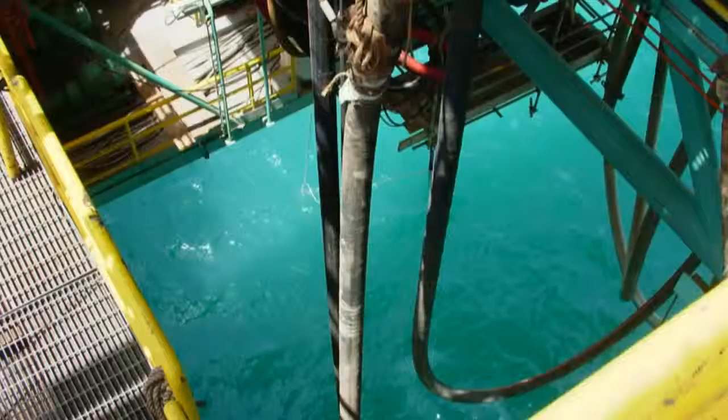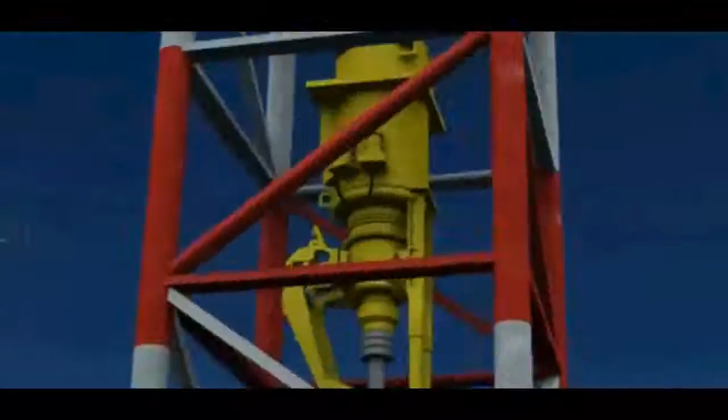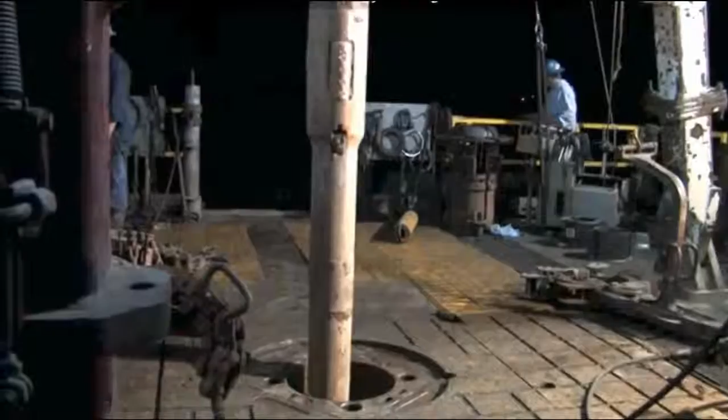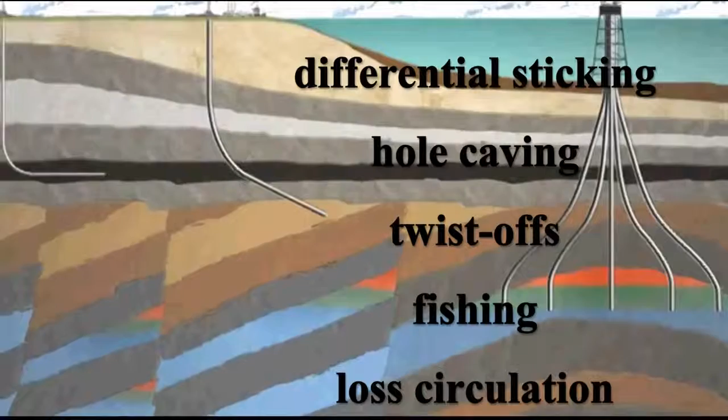Regardless of the experience and careful planning that have gone into drilling a well, things can still go wrong. Other, less dramatic events can also occur that can impede progress. They include differential sticking, hole caving, twist-offs, fishing, and lost circulation. Let me explain each of these in more detail.

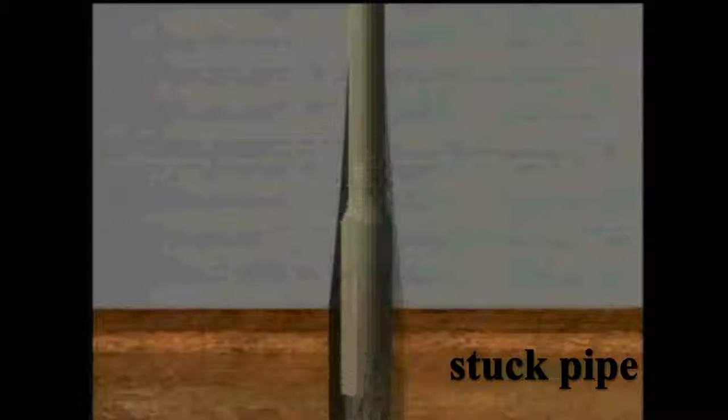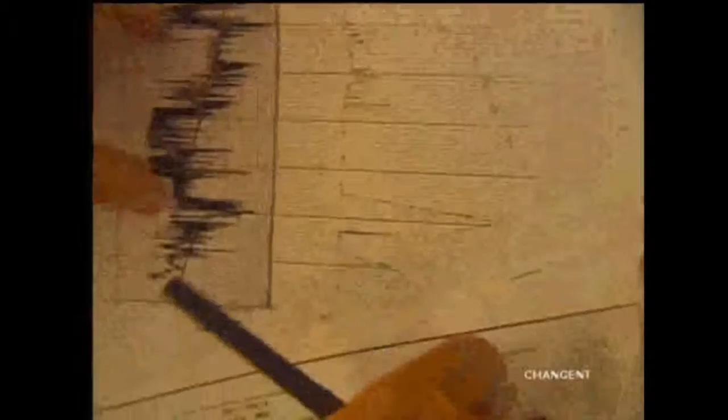Pipe that gets stuck in the hole is called stuck pipe and is a constant concern. When this common problem occurs, it is usually quite simple to resolve so that the drilling program can resume. In extreme cases, however, where efforts to unstick the pipe are unsuccessful, the portion of the hole with the stuck pipe must be abandoned, adding cost to an already extremely expensive operation. Therefore, the driller tries various procedures to free stuck pipe. Let's look at some.

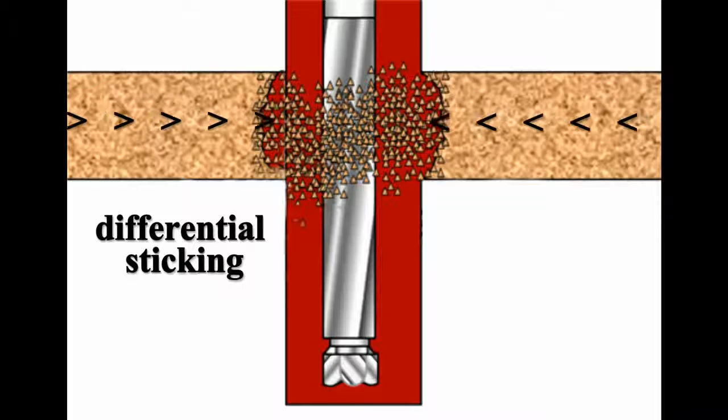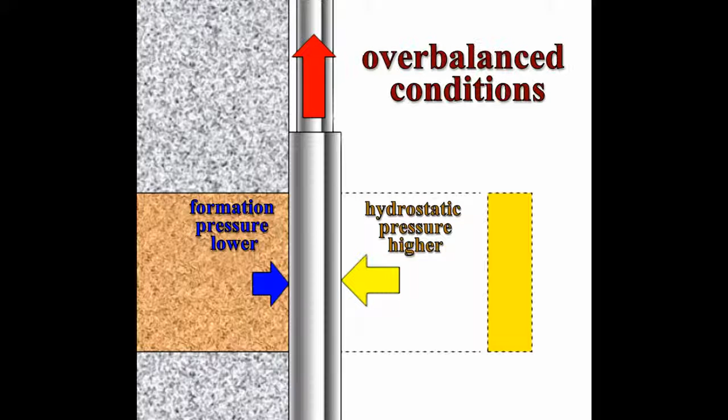Differential sticking is probably the most common cause of stuck pipe and occurs most frequently when drilling into softer, unconsolidated formations typical of continental margins. Differential sticking happens while penetrating permeable formations under overbalanced conditions. Some of the liquid in the mud is forced out into the formation, leaving behind the mud solids as a filter cake at the formation face.

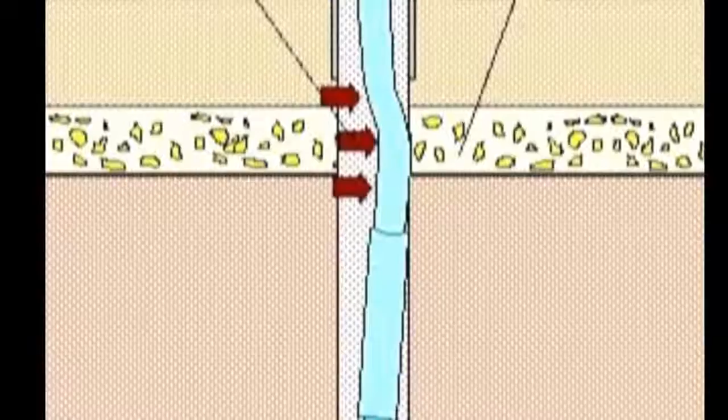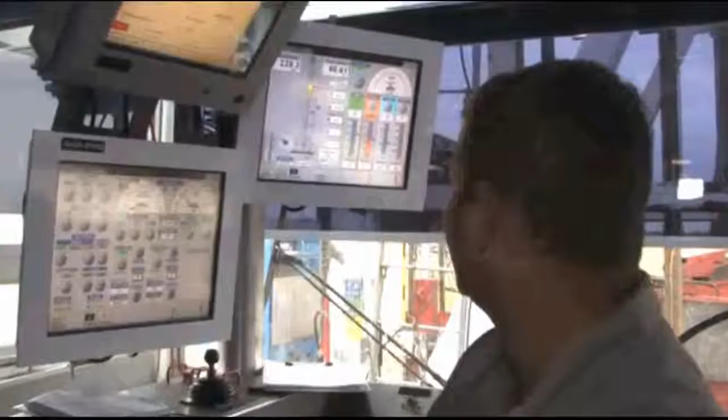If the pipe rests motionless on the side of the hole too long while making a connection, it can become differentially stuck. When a pressure differential is created between the mud column pressure on the inside of the hole and the formation pressure on the outside, the pipe is pressed against the side of the hole with such force that the pipe cannot be moved. To keep differential sticking from occurring, the driller tries to keep pipe moving in overbalanced pressure conditions at all times.

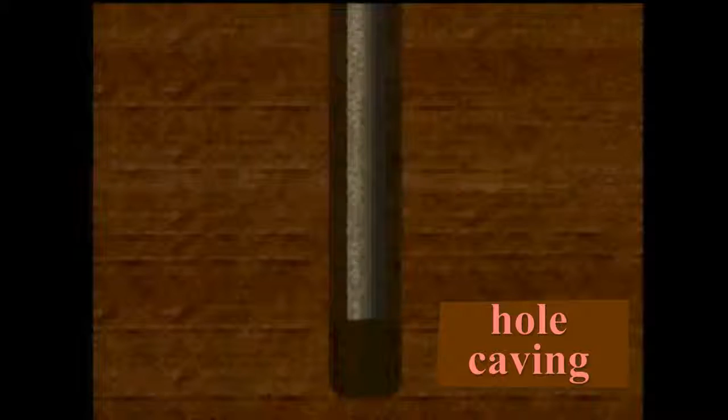Hole caving is another drilling problem. Here, the side of the hole caves in, causing the pipe to become stuck. There are many reasons for cave-ins. Here are three common ones.

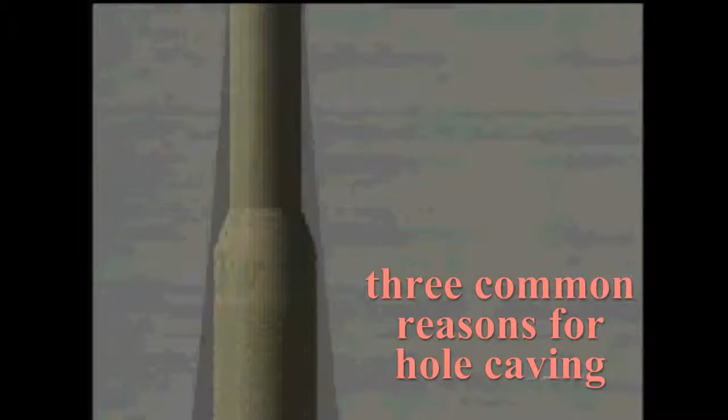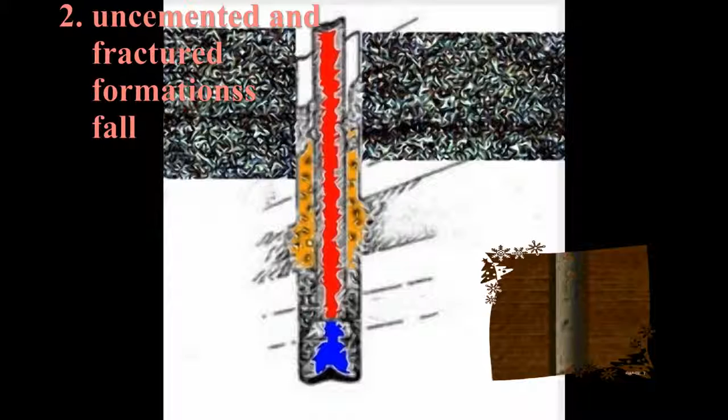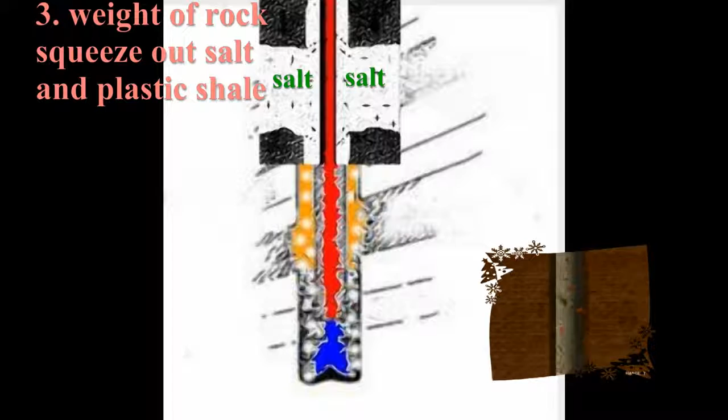Number one, absorbing the mud filtrate, some shales swell up and slough off their outer layers into the well. Number two, large quantities of material from uncemented or fractured formations fall into the hole. Number three, the weight of the overlying rock forces or squeezes out salt and plastic shale formations into the wellbore. Once the pipe becomes stuck, for whatever reason, it is necessary to free it.

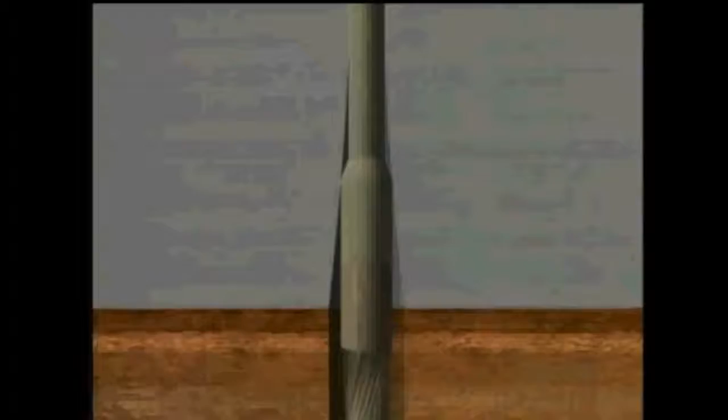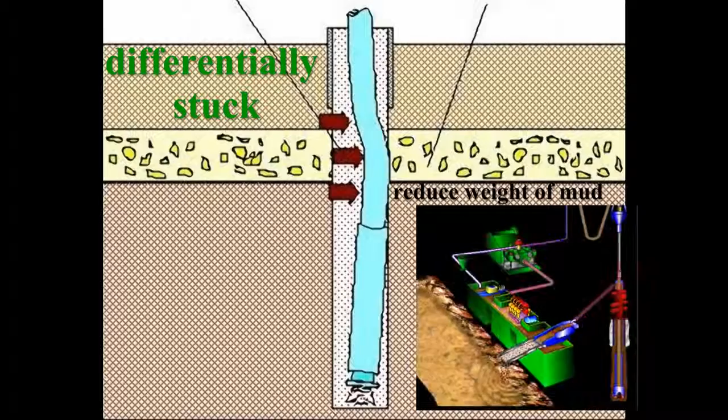The cause for the pipe becoming stuck in the first place must be found. If the pipe is differentially stuck, then the first approach would be to reduce the weight of the mud and eliminate the overbalance. Of course, this is only possible if there are no concerns about a permeable zone kicking. If reducing the mud weight and eliminating the overbalance is not possible, then another approach might be tried.

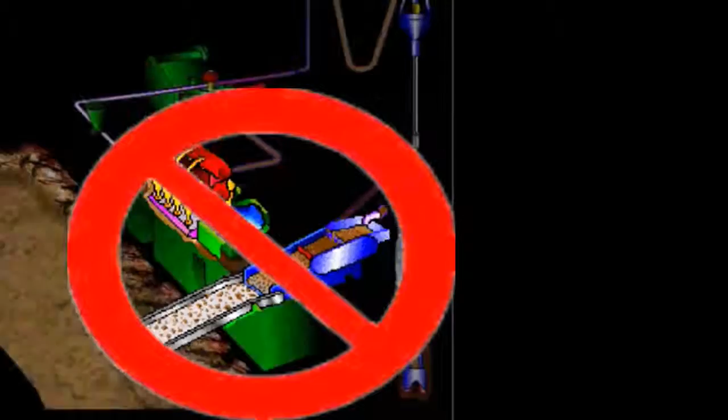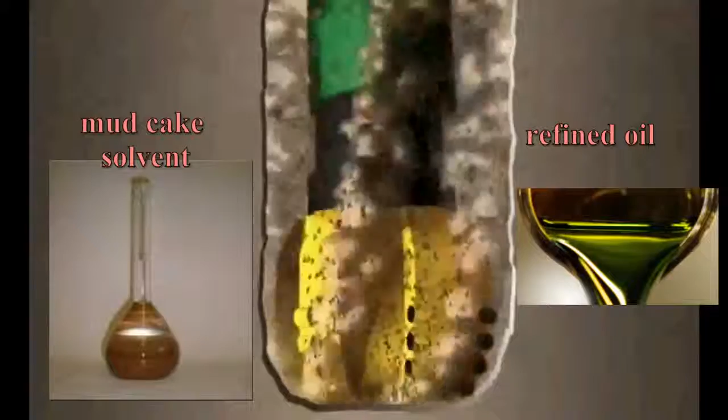Here, if mud circulation is still possible, then a few barrels of refined oil or mud cake solvent might be circulated down the pipe and then up the annulus until it's over the stuck area. Thus, by keeping the tension and torque on the pipe with this fluid, it may be enough to free the stuck pipe.

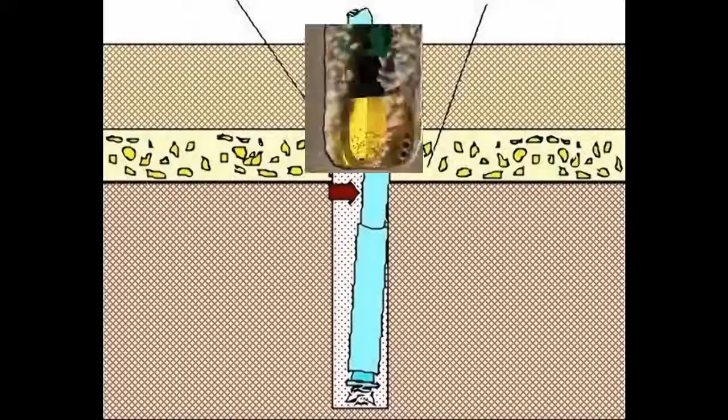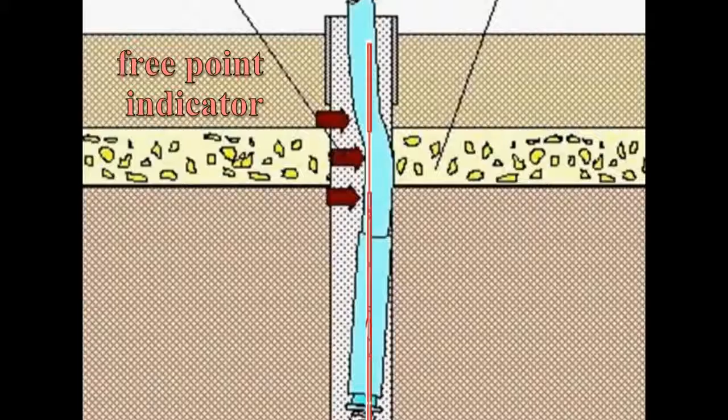If this approach fails, it may be time to run a free point indicator down the drill string by wireline. In this approach, tension is pulled on the drill string while the free point indicator locates the point below which the pipe is not in tension.

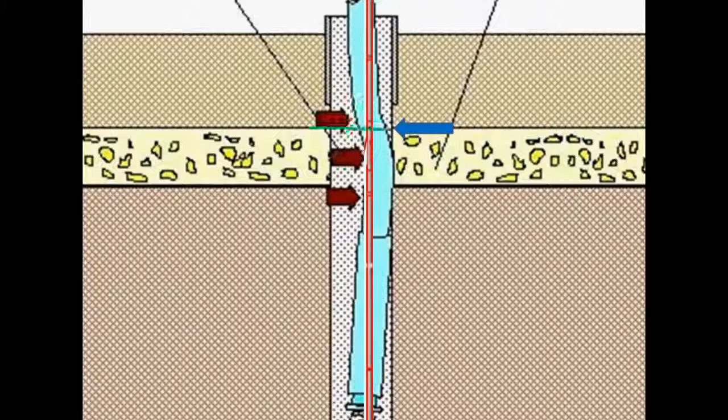Identifying exactly the spot below which the pipe is not in tension as the place where the pipe is stuck allows for a light explosive to be run down the inside of the drill pipe and detonated immediately above the free point.

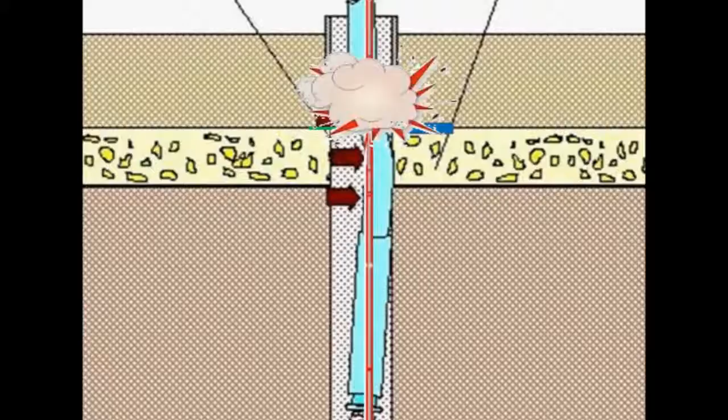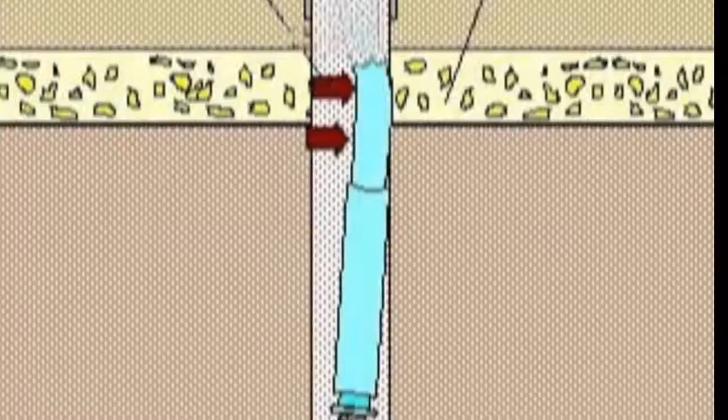Hoping that the explosion will rattle loose a coupling so that it can be unscrewed, the string is then carefully rotated counterclockwise in an attempt to break the rattled coupling. Once unscrewed, the string is pulled out, leaving the fish or bit and the stuck part of the drill pipe still in the hole. The drill string is then reinserted with a set of jars, or devices that deliver sharp blows.

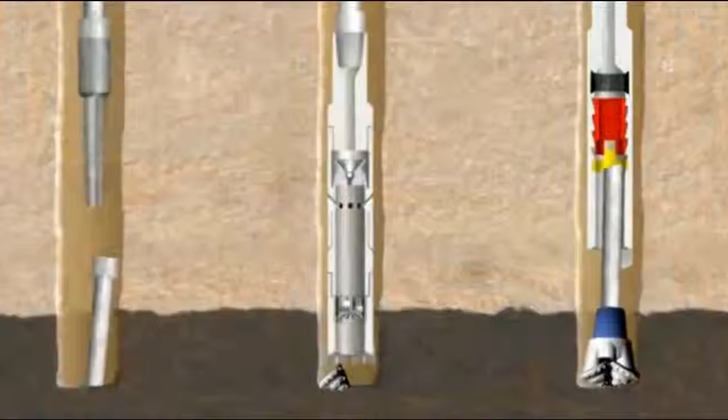Once in place, the jars are activated, sometimes repeatedly, delivering downward hammer blows to the stuck pipe. In most cases, this approach is successful and the stuck pipe can be quickly dislodged and recovered.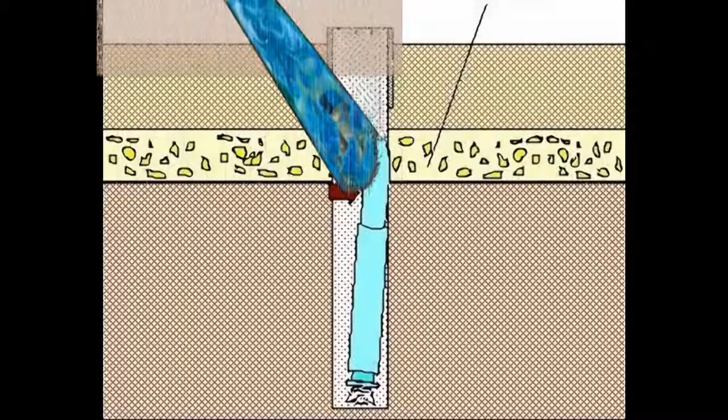If this method fails, however, a wash pipe can be run to wash over the outside of the fish, hoping to remove the material that is causing the stick. As you can see, different procedures are tried with the hope that one of these will free the stuck pipe, but, like I said before, if all attempts fail, then that portion of the hole with the stuck pipe will have to be abandoned.

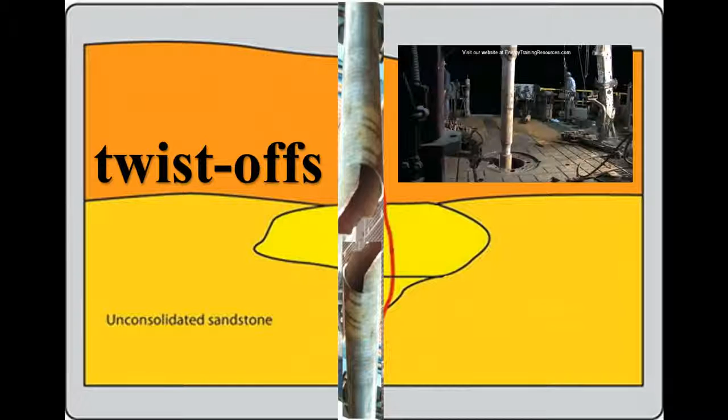Now, let's look at another type of drill pipe failure, called twist-offs. They occur from metal fatigue during routine drilling operations. If twist-offs occur, the first half of the broken pipe is brought to the surface, and then, for the piece still in the hole, it is necessary to fish it out.

Let me explain. As I said, first, the movable portion of the broken pipe is brought back up to the surface so that the condition of the pipe or fish and the break can be examined and analyzed.

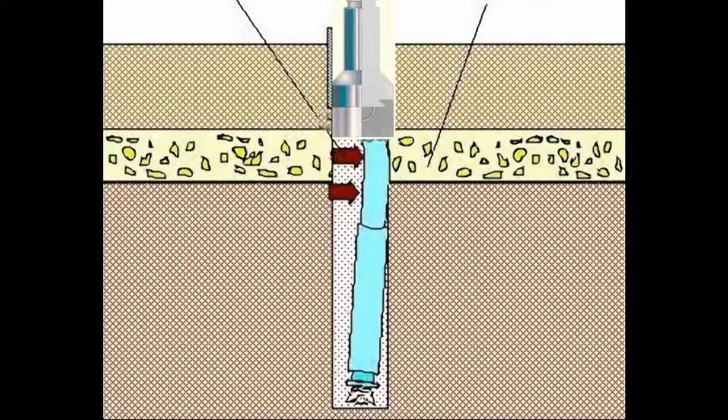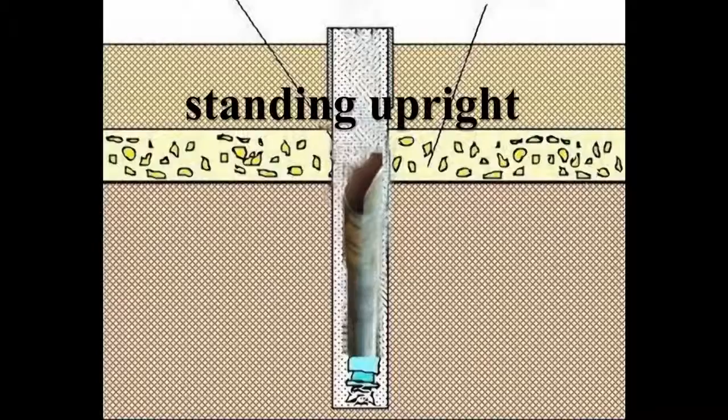Next, an impression using soft metal is made of the piece still stuck in the hole to provide a better picture of its degree of distortion and raggedness. The impression block can also indicate whether the fish is standing upright or is leaning over against the side of the hole. The process of retrieving the stuck pipe is called fishing.

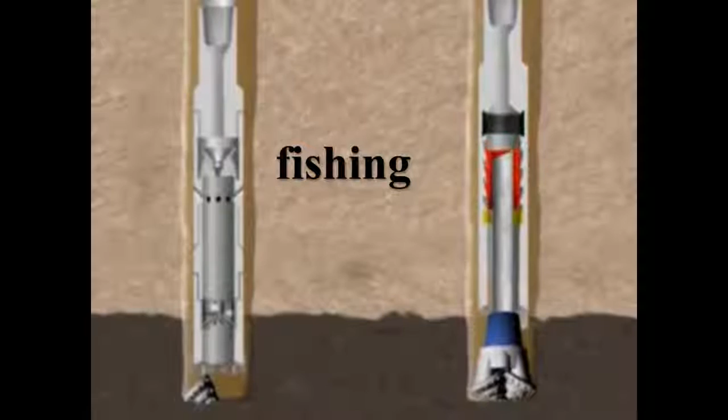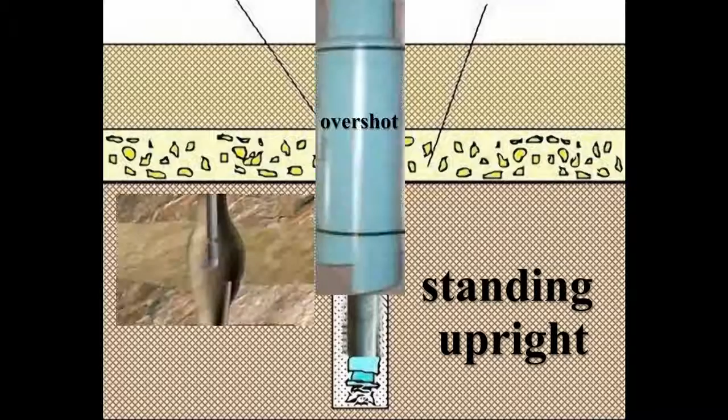Depending on the raggedness and position of the stuck pipe or fish, this fish may be able to be pulled out straight away, or it may need to be dressed off or cleaned up. A fish can be pulled out with either an overshot that fits over or swallows the fish if it is standing up clear of the side of the hole, or a spear which hooks or fits down into the fish if it is not.

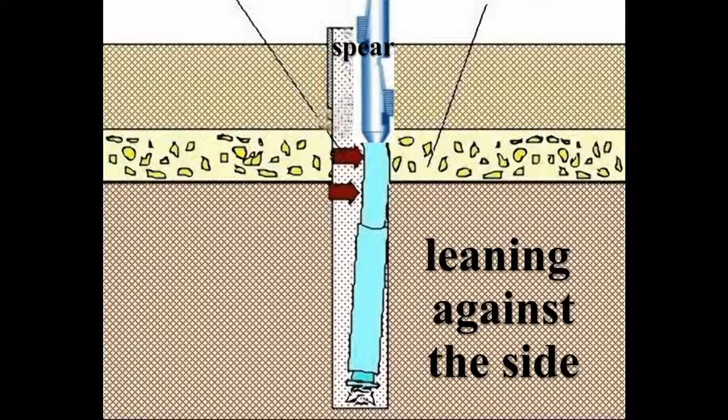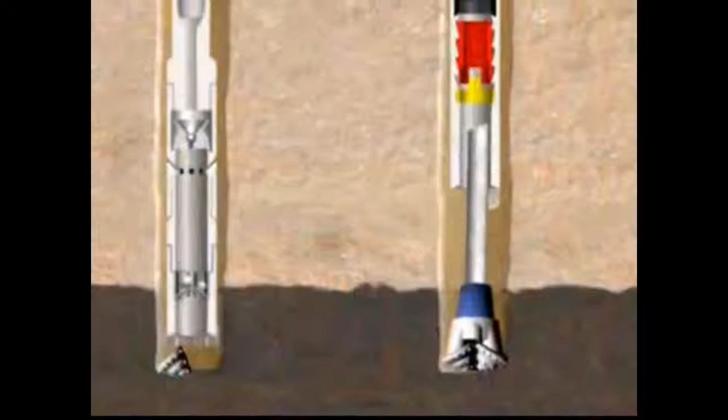Overshots are preferred to spears because spears can be difficult to remove if the fish is still stuck. Both overshots and spears have multiple grapples that can grip the fish securely, and once gripped, then uses jars or hammer-like blows in hopes of freeing the fish.

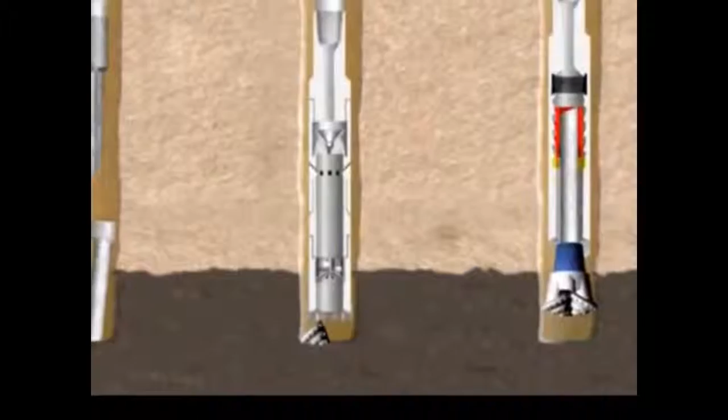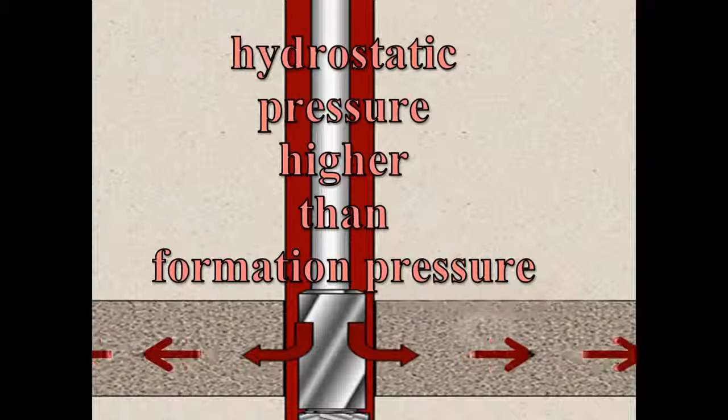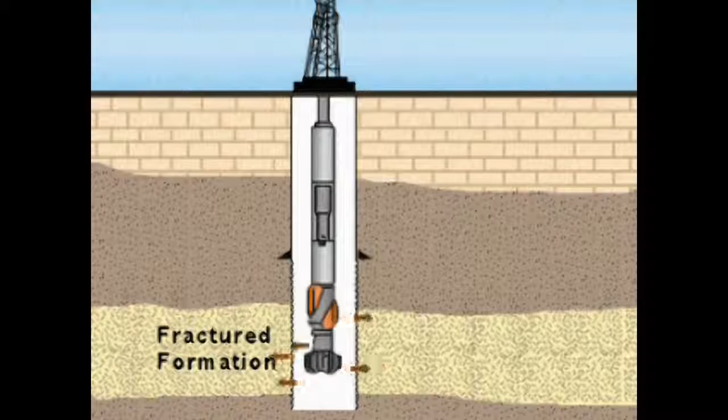Lost circulation is another serious problem. It is the result of hydrostatic pressure being higher than the formation pressure in an extremely overbalanced condition. The mud weight fractures the formation rock, creating large channels, causing the mud to flow rapidly out of the wellbore into the rock. This results in an expensive loss of mud and can damage the formation.

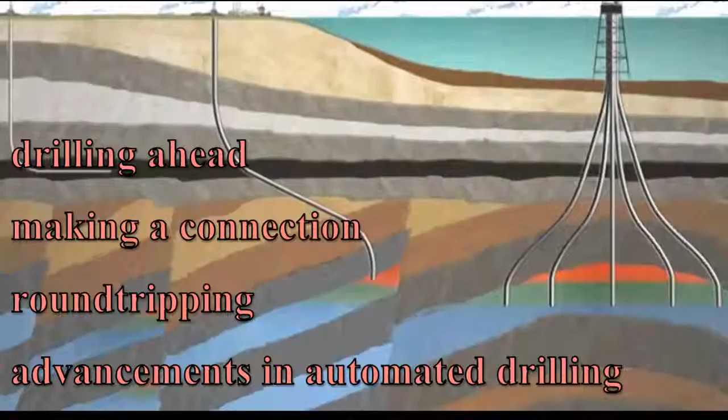Let's review. When discussing procedures like drilling ahead, making a connection, round tripping, and the advancements in automated drilling, it is clear that even with sophisticated tools and technology, drilling for oil is a complicated affair.

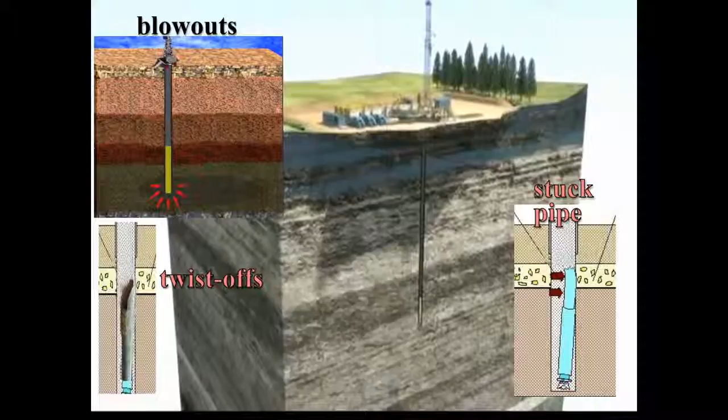In addition, because procedures can go awry when pressure and temperature conspire to cause blowouts, and where pipe gets stuck or where twist-offs or lost circulation can occur midway through drilling, it is little wonder that scientists and engineers work relentlessly to help improve procedures and solve problems like those mentioned above so that oil and gas can be brought to market more efficiently and cost-effectively and under ever-increasing hostile conditions today.

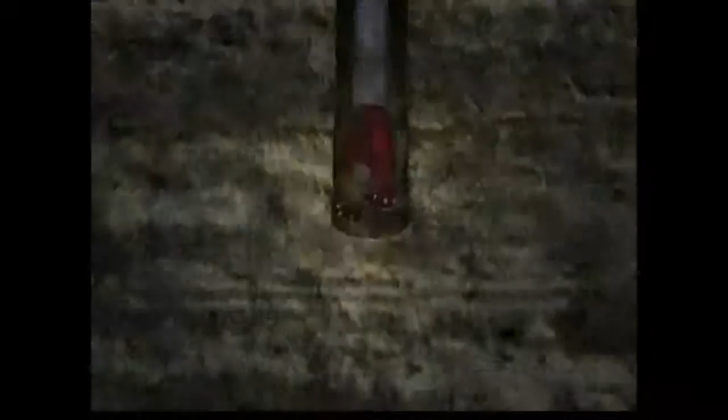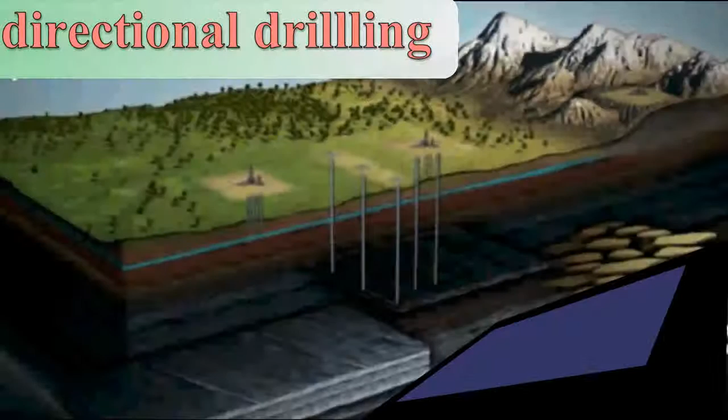Two relatively recent advances over the last several decades have expanded the ability of the industry to extract more oil and gas in places that were previously inaccessible. First, directional drilling and its offshoot, horizontal drilling, have revolutionized the way drilling is done.

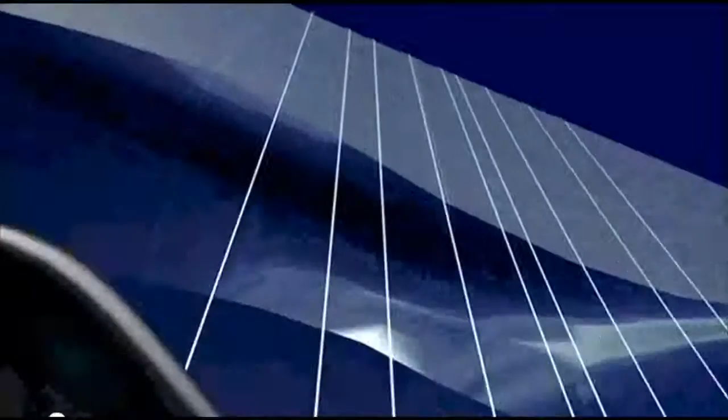Directional drilling was first developed when the industry moved offshore. Prior to that, wells were drilled vertically or relatively straight down. When drilling was exclusively on land, a rig could more easily and cheaply be moved to a new location to drill another vertical well. Offshore, especially in deep water, however, the cost of building another offshore platform in another location every time a new well is needed to be drilled proved to be prohibitive.

The industry, therefore, developed specialized tools to perform directional drilling so that they could drill multiple wells using rigs on the same platform. Today, this technology has advanced to the point that directional and horizontal drilling have replaced traditional vertical drilling in many instances. Let me highlight the areas where directional drilling has proven to be most beneficial.

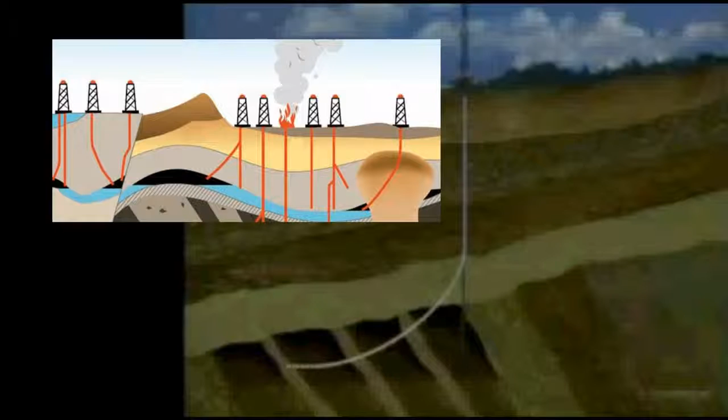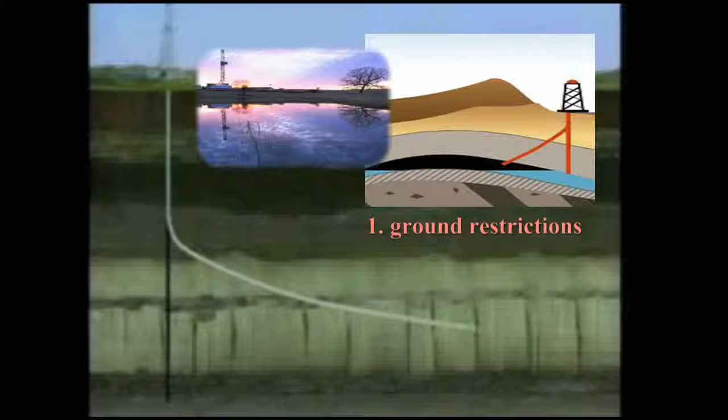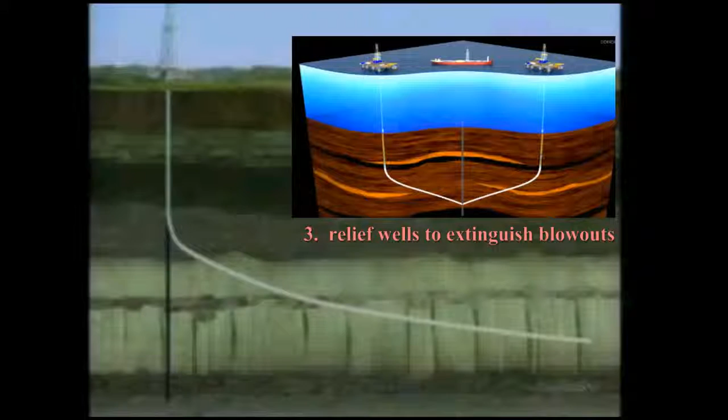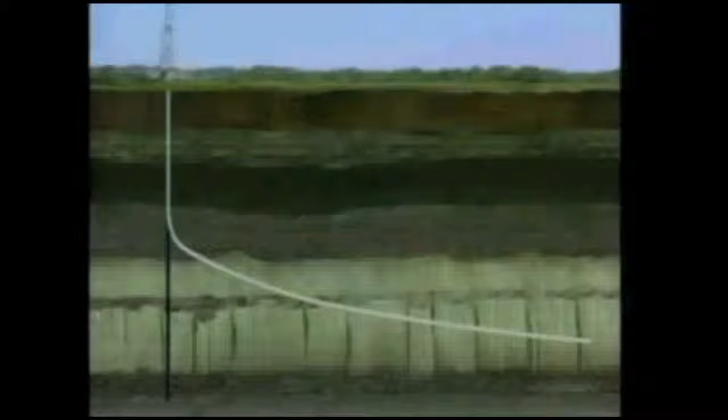Directional drilling has been used, number one, where vertical drilling is not possible due to above-ground restrictions imposed by mountain ranges or public parks or the presence of existing structures like buildings, dams, bridges, etc. Number two, when multiple wellheads can be grouped together in one location. Number three, when relief wells need to be drilled to relieve pressure on another well to extinguish a burning blowout. Number four, when multiple target zones must be drilled. Number five, when sidetracks are needed to drill around obstructions like a lost string of pipe.

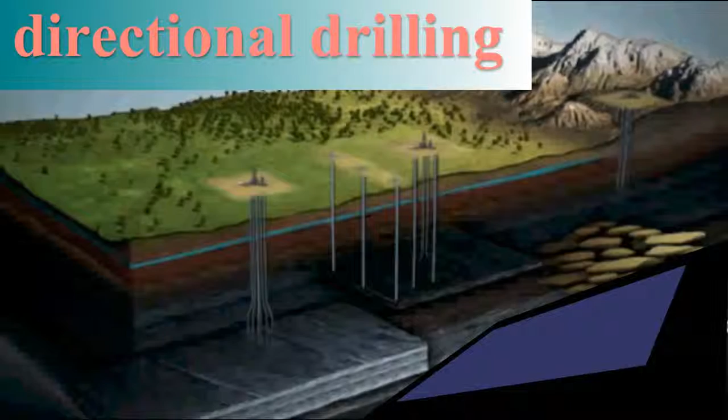Let's look at how directional drilling is done. As this illustration shows, directional drilling typically follows different configurations. It starts with a continuous build, holds, then drops off to form an S-shaped profile.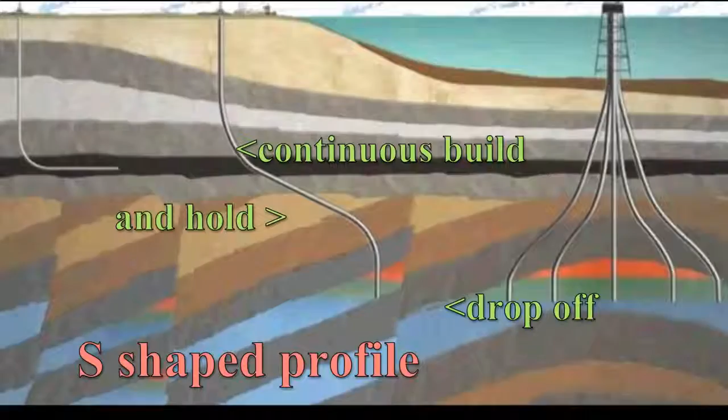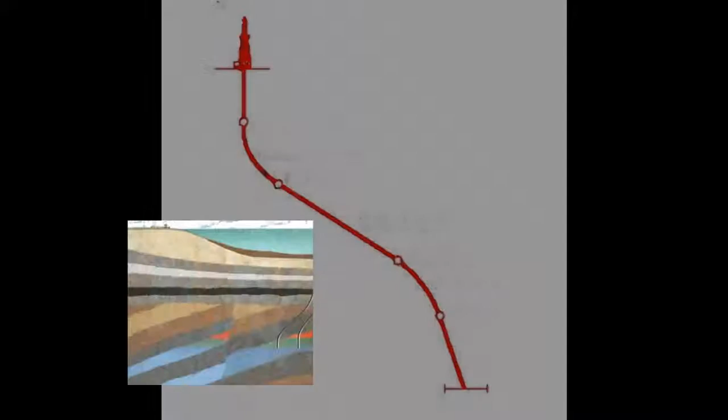As technological advances in directional drilling have increased accuracy while decreasing costs, the typical configurations are now drilled, for example, using the bent housing motor. The bent housing mud motor allows the bit to be tilted and steered into a preferred direction, thus allowing a directional well. In an S-shaped directional drilling profile, the initial section of the well is drilled vertically.

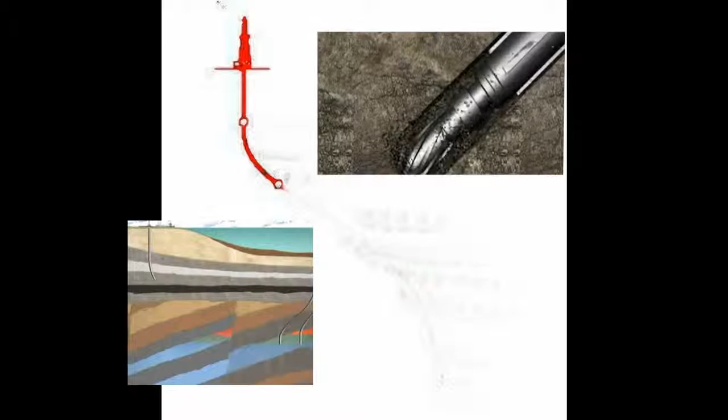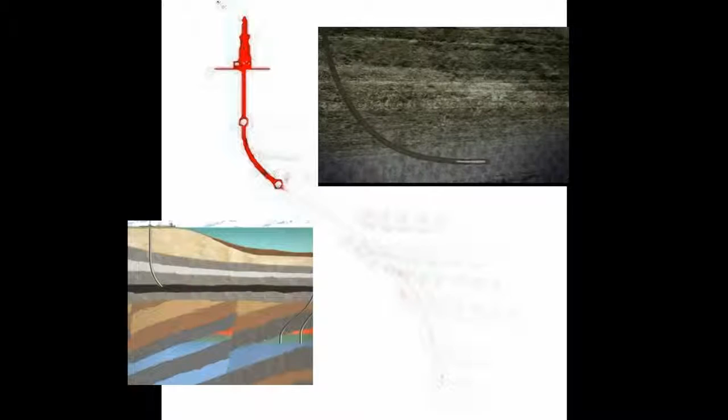When the area where the hole needs to be slanted or where the kickoff depth is reached, the bent housing mud motor is activated. The pipe is not rotated during this phase. The bent housing mud motor only turns the bit, making hole. The bent housing angle can be set and the drilling proceeds until the build angle is achieved. Once the initial deflection angle is obtained, then the angle is maintained as a straight line to the target zone.

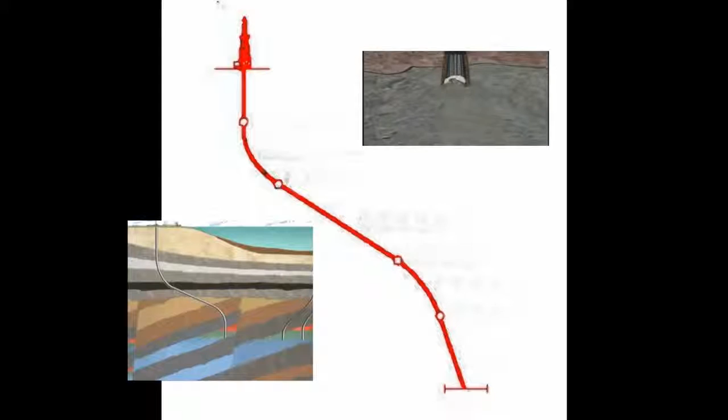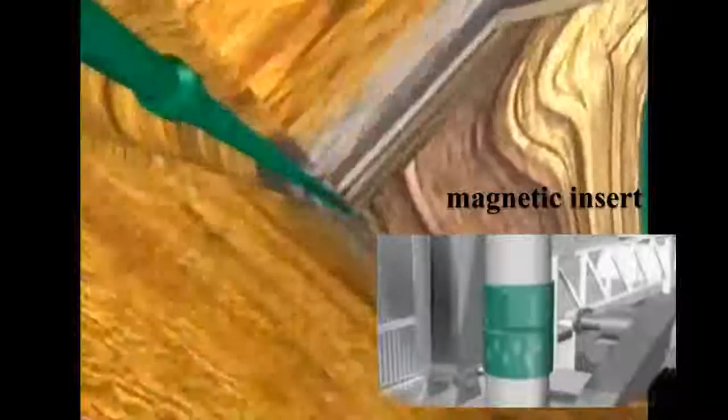If an S-shaped well is required, casing is set into place and a new and smaller bent housing mud motor is used to set up the drop angle, returning the well to a vertical position. It is this bottom hole assembly, BHA, that permits directional control. By using a magnetic insert in the bent sub-housing, the BHA can be precisely oriented to the target area while surveying the inclination of the borehole regularly.